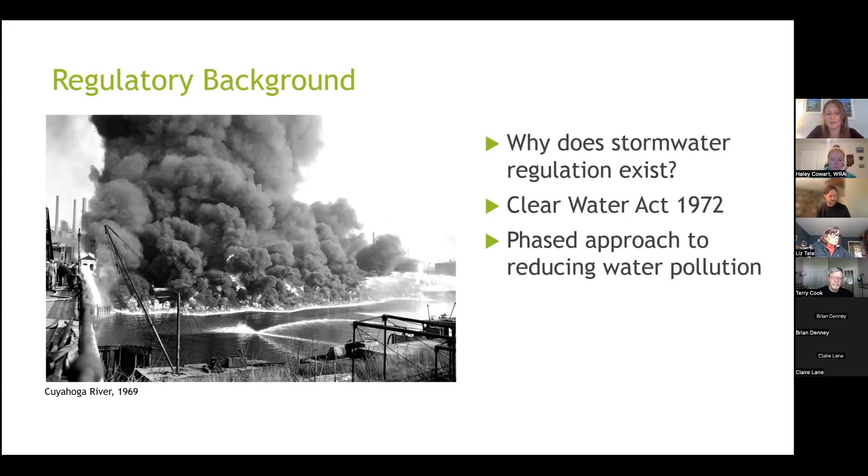So that fire and those issues were caused a lot by industrial pollution that was discharging to the river through pipes. But what we realized after we cleaned that stuff up in the early parts of the Clean Water Act was that there were still a lot of other pipes coming into those river systems, creating a pollution load that was past the level that was safe. So that introduced a phased approach, and that's what took us to stormwater regulation.

Okay, when we think about stormwater, we want to think about when the water falls in the landscape, where does it drain to, so that we can manage stormwater on a drainage basin system, something we call watersheds.

So the picture you're seeing at the left of your screen is the state's regional watersheds. Those are the boundaries that kind of define what water runs to what river. And if we zoom in and take a look at our watershed here in central Indiana, you can see it's shown here on the map on the right. It includes the White River running kind of through the middle of it all, and then about 15 other primary tributaries.

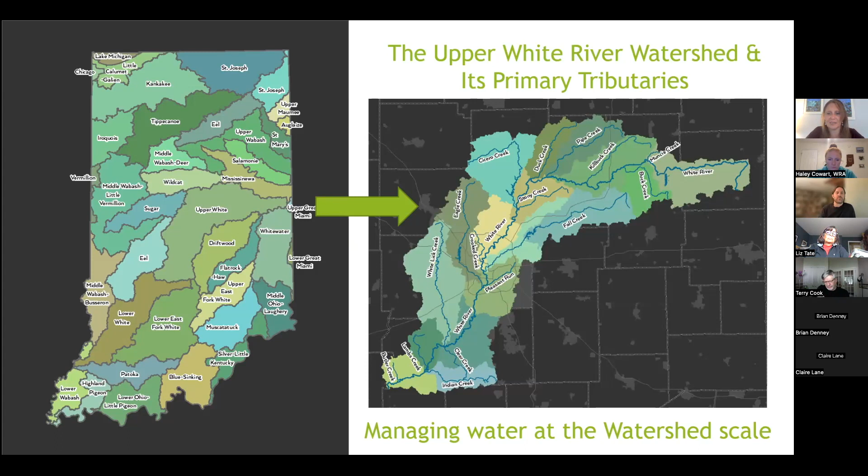And so I'm going to show you a few more maps of how stormwater comes into this system, just to give you a sense of how it's aggregating and creating a challenge for us. And so hopefully you can remember this map and know that this is what we're doing, is trying to plan across this entire area.

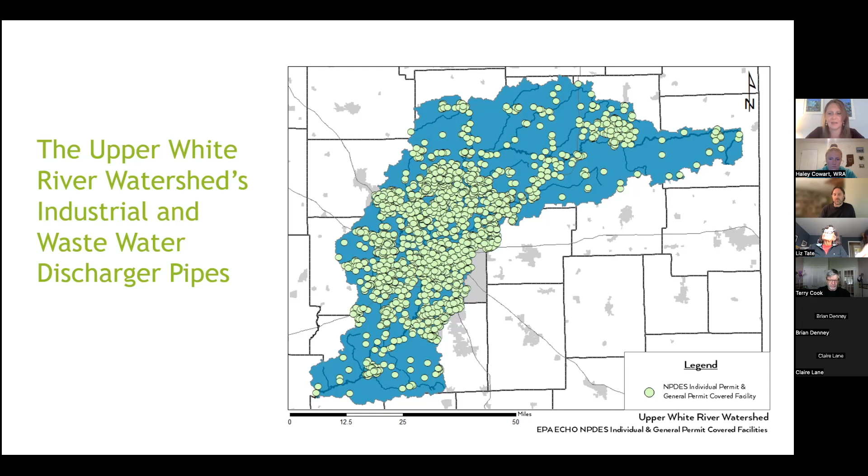Okay, so if we look at that map in a different way, this is showing you all of those industrial pipes or wastewater pipes that are coming back into one of those tributaries or the main stem. You can see how many dots, those are all different pipe discharges. So you can see our watershed and its waterways are under pretty heavy pressure from those releases.

And what we want to do now is kind of show you how the stormwater system interacts with all of that other wastewater and how that actually all contributes to our drinking water supplies. So again, my job is just to warm you up to why this is so important and your role. Your role here is to help maintain that private infrastructure.

So the picture I'm showing you on the left is just a cutaway that should be familiar to you about how our sewer systems function. I think that's fairly common knowledge to homeowners, that there are sewer pipes that come out of your house and some part of it traverses across your yard and then eventually connects in the sidewalk or in the street with some amount of public infrastructure.

And then many times there are cleanouts on those systems, and homeowners often maintain those cleanouts. If you've ever been lucky enough to have tree roots invade those systems, you know there's a maintenance piece that sits here on the private property side. Okay, so that's sewer. If we look at stormwater infrastructure, it's strangely not that different, right?

We're funneling stormwater off of our houses and hardscapes into storm drains. And then in many cases, they may run through something called a mechanical separator, which we're going to talk more about in just a little bit. That's designed to kind of swirl out any trash or settle out any big sediments. And then it runs many times into a wet pond or maybe into a different best management practice or BMP. And then eventually either discharges to another pipe system or directly to the stream.

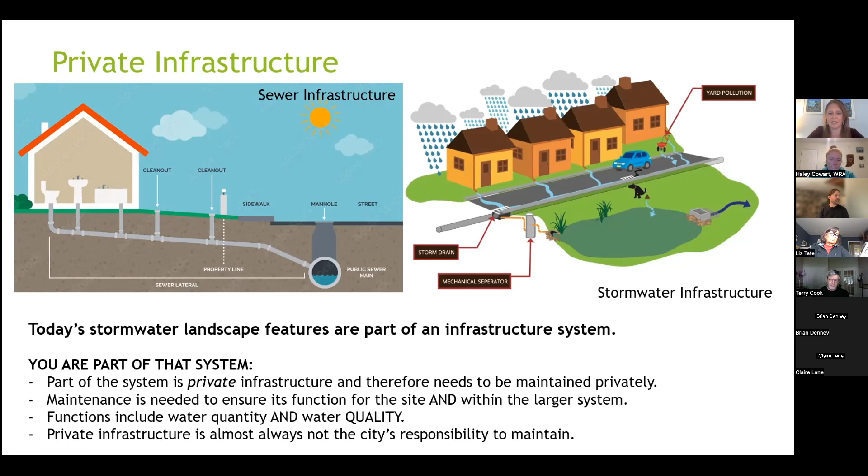So here's an example of one subdivision, just so you guys can kind of get your head around what we're talking about in a real landscape. This is a subdivision in Carmel, and each of these yellow dots that you're seeing on the screen are best management practices. Those are the mechanical separators. So those are those units that are underground. You probably don't even notice them. There is a cleanout on the top of them, and those things all need to be vacuumed out in order to be able to continue to function when dirty stormwater comes into them.

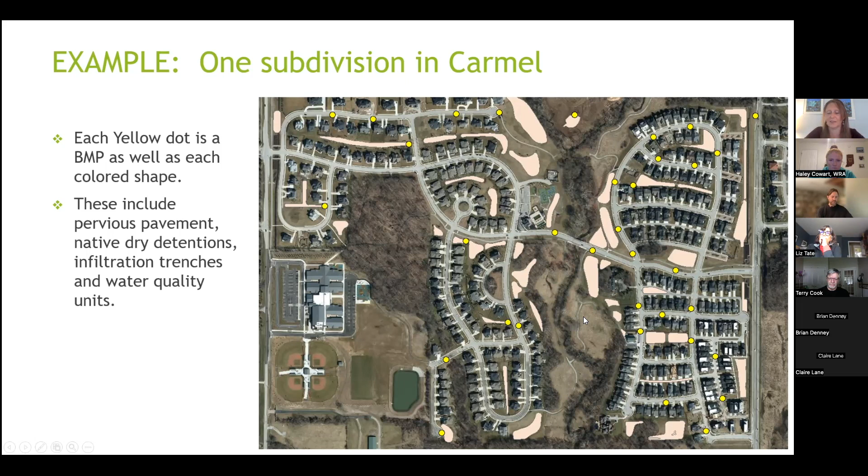Then you're seeing all these pink or tan colored shapes. These are other best management practices on the property or BMPs. Those could be dry detention, wet detention, permeable pavement, swales, trenches, all those kinds of things. So those also add up and become part of this system and need maintenance.

So if we look at what happens once something leaves that Carmel subdivision, I'm showing you now again our watershed basin, and these are all the different cities and towns with these red diamond shapes that are required by law through an agency called IDEM, or the Indiana Department of Environmental Management, to try to get the stormwater pollution cleaned up before those pipes come into the streams, much like the industrial dischargers have to do.

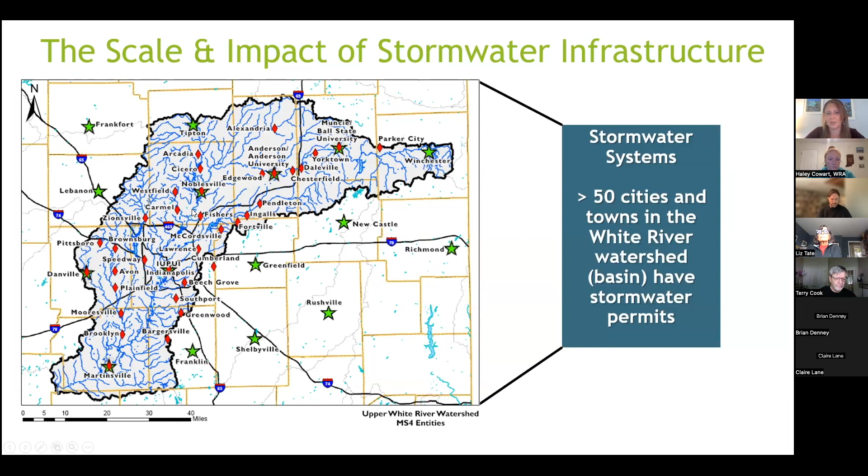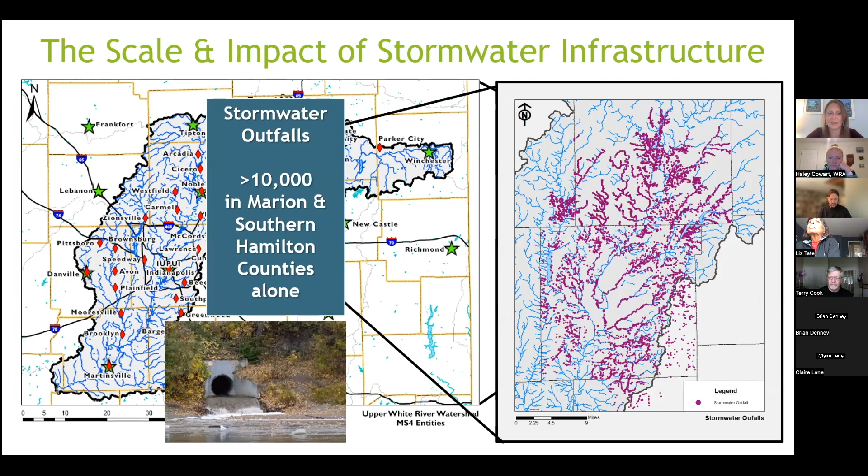So across the 50 cities we have in our basin, if we zoom in and just take a look at Southern Hamilton and Marion counties, you can see that that's about 10,000 storm drains coming into those streams. So that's on top of all those little green dots I showed you with the industrial and wastewater discharges. So you can see that a lot of what's in our waterways is really what we are putting there and what's running off the landscape.

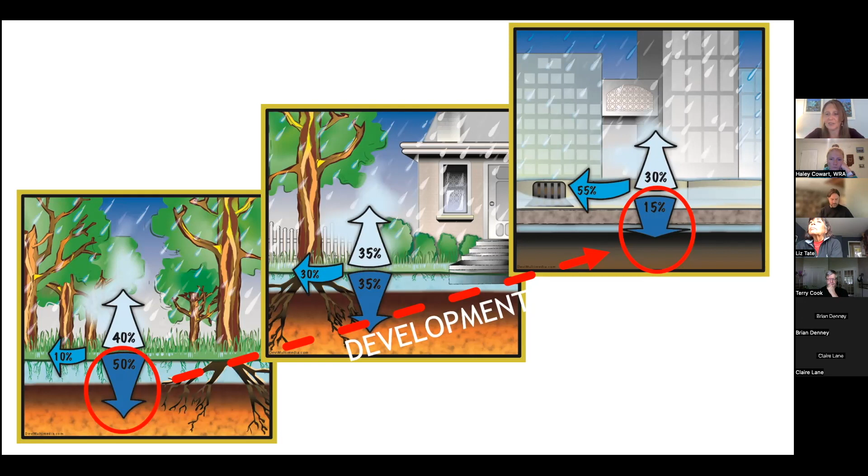So we made this little graphic to help folks understand the percentage of things that change in that water cycle when we move to a development, whether that's a subdivision type development or a really concentrated urban development like you see on the top right. So we measured water in the downtown Indy area in an undeveloped condition, which is the picture on the far left. It shows you that when there's no development or hard surface on the landscape, we get about 50% of the water to go back into the ground naturally. And as you move up that development continuum, by the time we hit pretty urbanized conditions, we've dropped that amount of water that infiltrates down to about 15%.

That leaves us with our first problem, and things we want to make sure you're aware of, is the loss of critical groundwater infiltration as we put those hard surfaces down. So when we get into looking at these practices here in just a minute, if you have what they call green infrastructure or infiltration practices, those are designed to try to help overcome this problem, so that we're recharging our groundwater, since we have about 70,000 wells or so in our watershed that need that water.

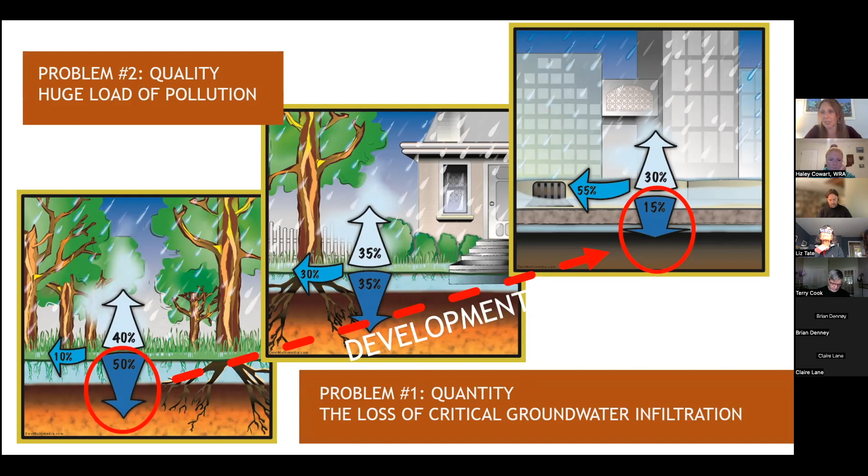So that's one challenge. The other challenge when we look at stormwater is that 55% that's now running into the drain is coming with huge loads of pollution because it's running across parking lots and streets and rooftops and yards with fertilizer and all that kind of stuff. So what comes into those pipes is fairly polluted.

This next slide here is just giving you a sense of the scale of that pollution. So the streams in our watershed that are shown here in red are already past water quality standards. So they're not meeting the uses that we want to use them for. Particularly, a number of them are impaired for bacteria, which is a stormwater problem. The blue ones either have not been monitored or maybe are in okay condition if they have been monitored.

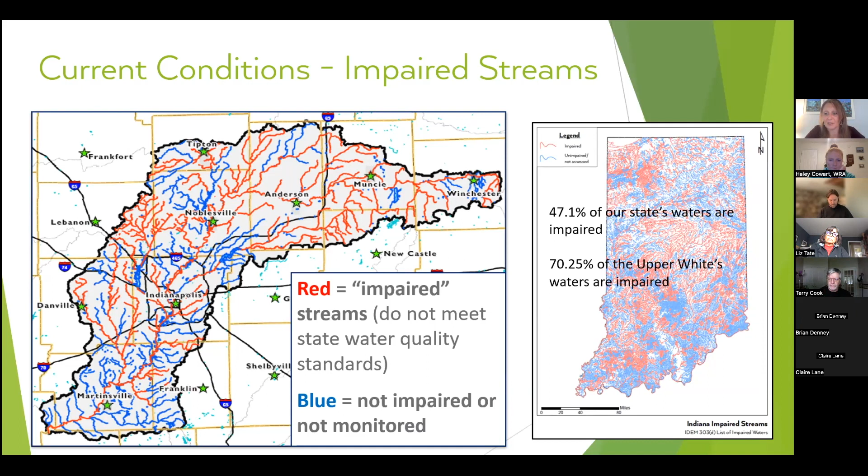If we look how that compares across the state, you can see this is not a problem unique to central Indiana, but what is challenging is that because we have almost 2 million people in this watershed basin, about 70% of our streams are impaired versus other parts of the state that are about 47%. So I'm going to hand this over to Scott in just a few more slides, but I wanted to give you a sense of why this is so important.

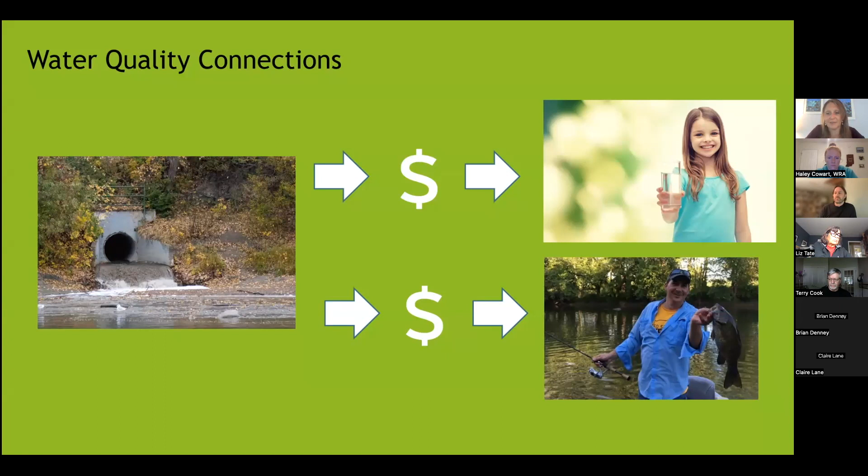If you haven't picked up on that already, that water is also the same water we use for drinking water. And so here you have a picture on the left of a drinking water intake at 116th Street. And this is the raw water condition in the summer. So that green scum you're seeing in there is algae building up from all of that runoff, fertilizers, pet waste, all kinds of things that get put onto our landscape and come into our water supply. What that means is we have to spend a lot of money once all those storm drains hit the water and cause those algal blooms to clean it up, to get the bacteria out, to make it safe enough to drink and safe enough to recreate in.

It also presents some challenges, as I mentioned to you, about water availability, because if we're not infiltrating that water back to the groundwater supply and we're just allowing all of it to run off and out of our communities, it's creating a water availability challenge. So some of our stormwater practices need to be maintained specifically to ensure that the infiltration goes back into the ground. So this is just a map of an interesting study, if I spark your interest today, that we did a couple of years ago, looking at availability into the future. And essentially what you can see on the map on the left is that currently most of the sub basins inside our region here have enough water, excess water available.

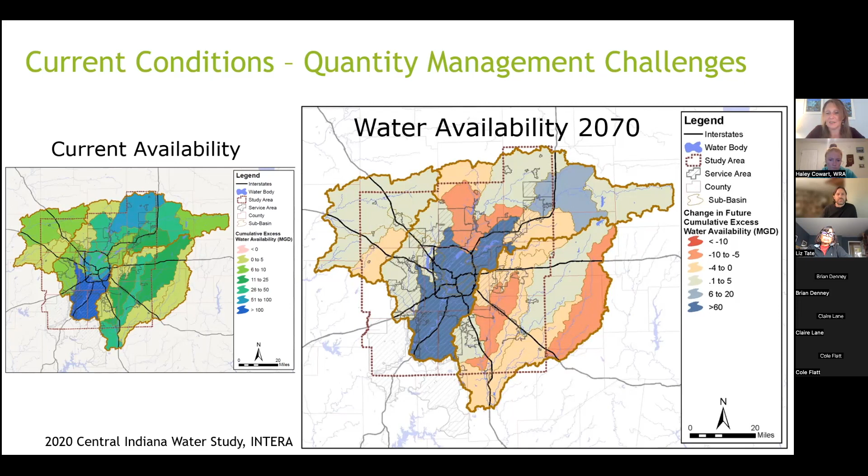The forecast for that changes dramatically by 2070, and you can see some of those with orange and tan shapes moving into deficit. So that's just a reminder that when you see these stormwater practices on your landscapes, like the one shown at the top left, they're designed with special soils a lot of times or gravel underneath them to get water to go back into the ground. And so maintaining how that system works is important to drinking water because it comes up out of those wells. And then also those wells supply most of our jobs, the water supply they need as well.

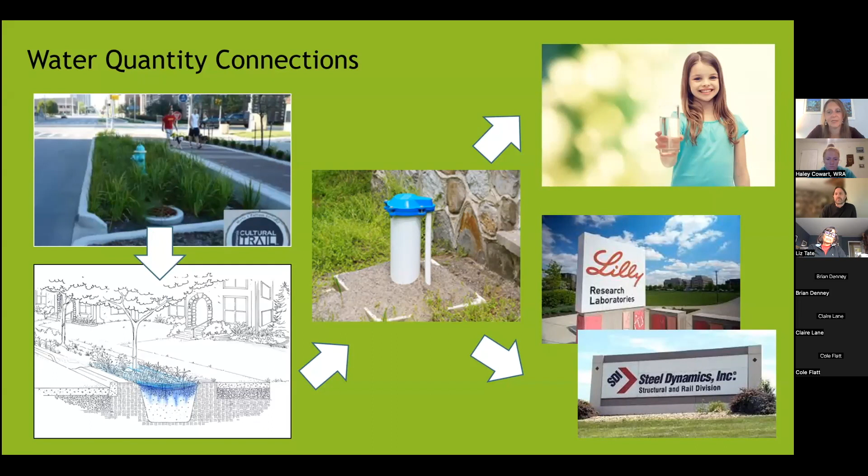So with that, I'm going to let Scott talk to you about how, for all of the different landscape practices, we've put together a set of resources for you to understand how to maintain those so that we can make sure that we have a sustainable water system into the future. So the things you're seeing in front of you are just some of those BMPs that might look familiar to you. And we're going to give you hopefully as much help as you need to make sure that the ones that are in private hands are being maintained so that when they hit the city infrastructure, we're in good shape.

Okay, with that, I'm going to hand it over to my colleague Scott to take you through the program, which is why we're really here. Hopefully I did my job and let you know why it's so important.

Scott? Hi, everybody. My name is Scott Miner. I help manage some of the programs within our regional stormwater program, along with Jill and Haley. So yeah, there's a lot to this whole water system. It can be pretty intimidating, but that's why we created this program. So hopefully we can help give you a better idea of what's out there, what needs your attention, and how you can go about doing it.

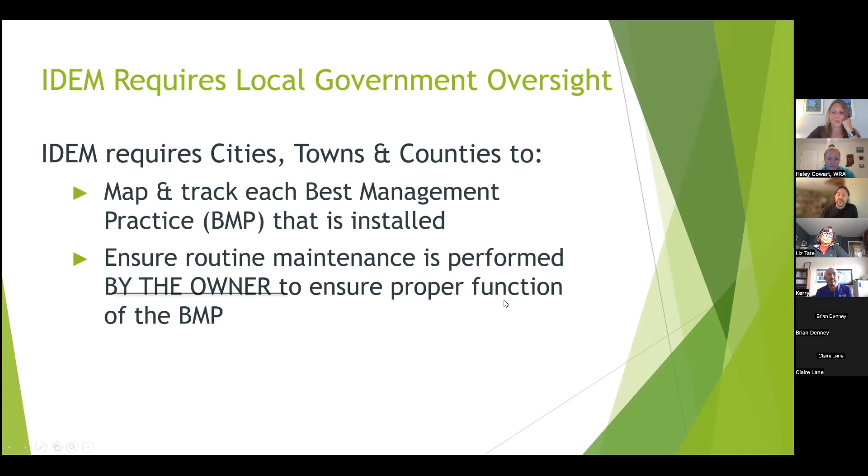As Jill mentioned, this is a regulatory obligation. So IDEM pushes that requirement onto our cities and towns to track and map all these best management practices as they're installed, as new developments come online. And this dates back to the early part of the 2000s. And then it's the responsibility of the owner of each of these developments, the owners of these BMPs, to ensure routine maintenance is performed.

So as Jill mentioned, we like to use the term, you own a stormwater utility. And we use that phrase to try to impart the importance, the critical nature of some of these things. But again, don't be intimidated. The Stormwater Landscape Maintenance Training Program is designed to help you get through some of this. It will help you determine if you have these BMPs on your property, and you can do that through what we call O&M manuals, operations and maintenance manuals. We will give you some contacts for local officials. They can help you find your O&M manual if your HOA doesn't currently have that in hand.

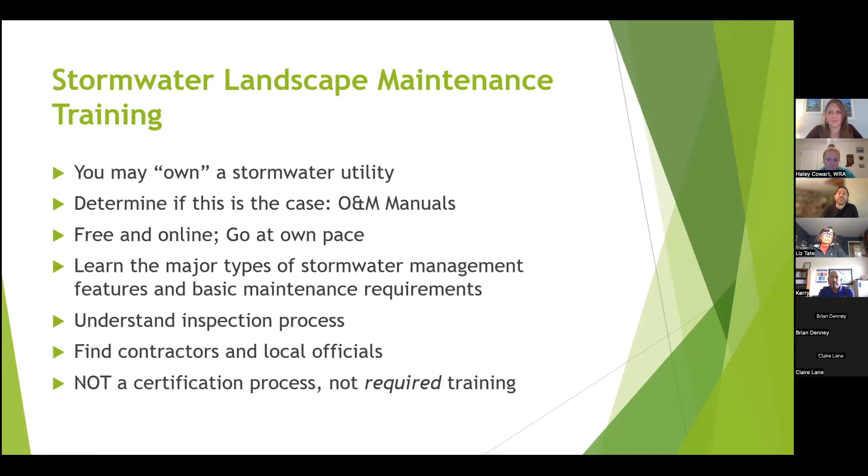The program is free. It's online, and it is go at your own pace. We'll go through all these major types of stormwater management features and the basic maintenance requirements. But if you don't have pervious pavement on your property among your BMPs, then you don't need to watch that video. You don't need to go through that module. We do have modules on the inspection process. We have downloadable material for finding contractors and local officials. And we do like to say this is not a certification process. This isn't required training. The city doesn't require you to go through this and get some sort of certificate. It is just there to help you, and we think we've put together a program that does help quite a bit.

So there are different uses for this. I think most everybody here, judging from the chat, is with an HOA. So we do encourage you to distribute the link and this information to your HOA community. There are several other uses you can consider depending on your situation, but even just getting through the first couple modules, where they provide some of the context that Jill briefly provided at the beginning of this talk, can be a great help in getting everybody on board with meeting these responsibilities.

And with that, I'm going to take over the share here so I can help walk you through the program itself and how to find it. Okay, can you see my screen there?

Need to move some things around so I can see it. Looks good. Okay, on this one, Scott.

Okay, so this is the White River Alliance website. And this is where you'll find access to the program and the links to create an account and get into it. And I think Haley will probably share that link in the chat. So if we scroll down, we have this portion right here with the training. You come here to create an account and here to access the training modules. Once you create an account, you can come back, bookmark this page. You can always come back and access the training modules just by clicking there.

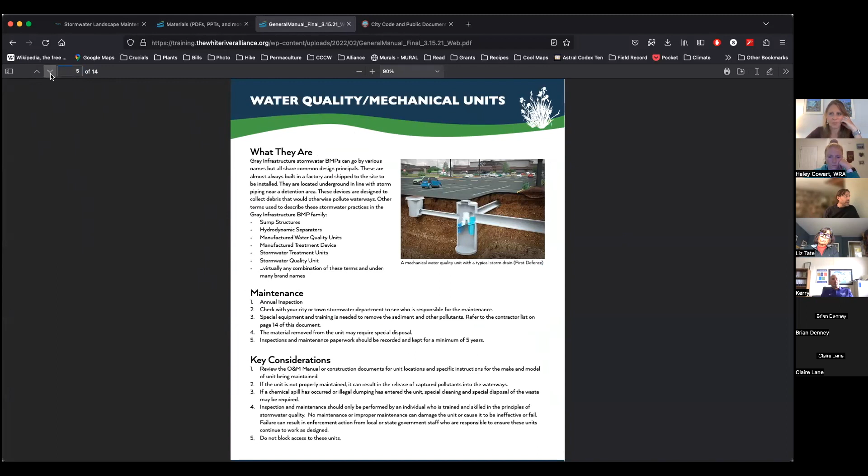So we put this together to track closely with the modules themselves. So we go through a bit of the orientation subject matter here at the beginning, and then we get into each of the BMPs themselves. Each one of them gives you a short description, a list of the maintenance requirements, and some key considerations if you have one of these on your property. Click through these real quick. So next steps, this bit here sort of tracks with module 12, where we go over some things you can do as an individual on your property. We have contact information for your local officials.

We have things to consider before hiring a contractor. A lot of these BMPs have landscape features that are not your normal landscaping, and they may require a little bit of specialized landscape care. So not all contractors are trained to maintain these features. So we've got a set of questions here to help you make sure you're hiring the right one. We've got contact information for different maintenance providers, ponds, green infrastructure, and then mechanical separator units.

Okay, that is the program in a nutshell. Come back out here. We still have about 5 minutes here. We can stay on longer if you like, but we do want to open this up to questions now and make sure from that fire hose of information we just provided, we're giving you something that is useful and something you can carry forward in your community. So I think we've got John with the City of Carmel here to help answer questions of a more technical nature, Claire as well. So I'm going to turn it over to you guys now for any questions you may have.